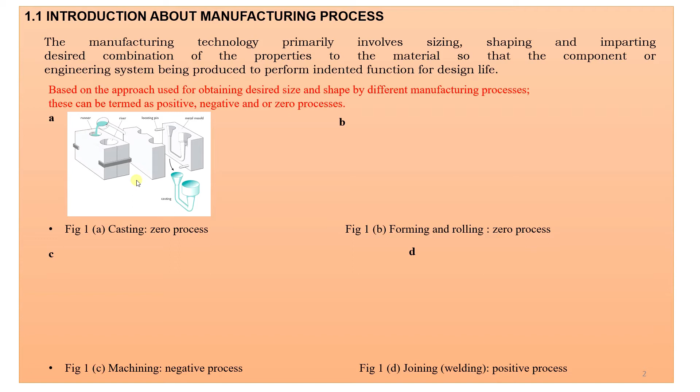Let us go to the second one, forming process. If you are taking X amount of material, you can use any forming tool. You can convert all the materials into useful work, and during the finishing operation you may remove some materials. If you're still confused with the first one, you can go with the second one. You take V1 as the initial condition, you are continuously putting it through the press, and as output you have a nice sheet. There is no material wastage, so we call this a zero process, and this one also a zero process.

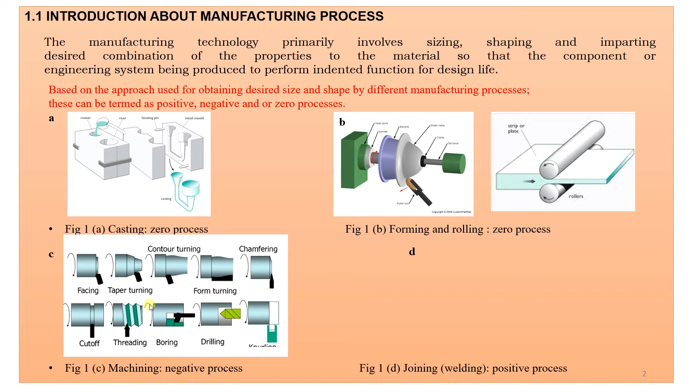Let us go for machining process. Initially you're taking one rod and you're going for facing, that means some amount of material is removed. If you see here the taper portion, some material is removed, and here also boring, drilling, etc. Let us compare the volume of the initial and the final. Initial volume V1, final volume V2, so the final volume will be very less as compared to the initial volume. So this is called a negative process.

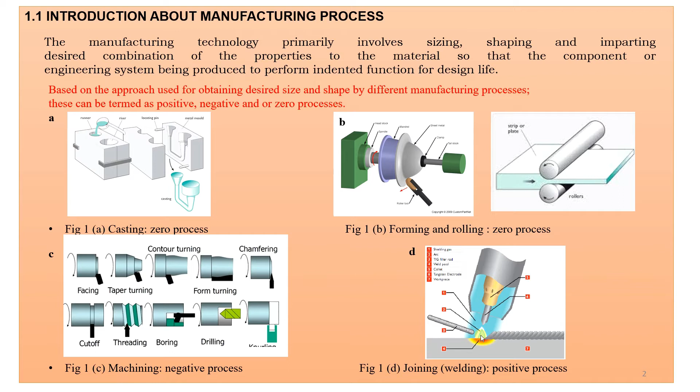Okay, then what about welding? In welding, if you are using filler material, we are going to add some third element over the welded joints, so material is added after the process. So if you are comparing the volume of initial and final, in most cases V2 will be higher, so that is a positive manufacturing process. You should know this simple phenomenon before you start the manufacturing process lesson.

Okay, now we are going to casting. Casting is nothing but you're going to melt the material and pour it into the required shape. Once it is cured, you're going to take the material out, clean it and use it. Okay, so what are the steps? Casting starts with pattern making. Yes, the shape which you want, you have to make as a pattern. Okay, a ditto of the shape. You can make it of any material. In the upcoming slide we will see what the pattern materials are.

Then obtaining the casting geometry. By using the pattern, you have to make the geometry or shape in the casting sand, or you can use any other casting process. Then if you want, you can go for core making or molding. Core making means if you want to make any hollow section, you need a core, otherwise you just go for molding, that's okay. If you have an alloy or any other material, just melt it, then pour it into the shape which you made in the sand.

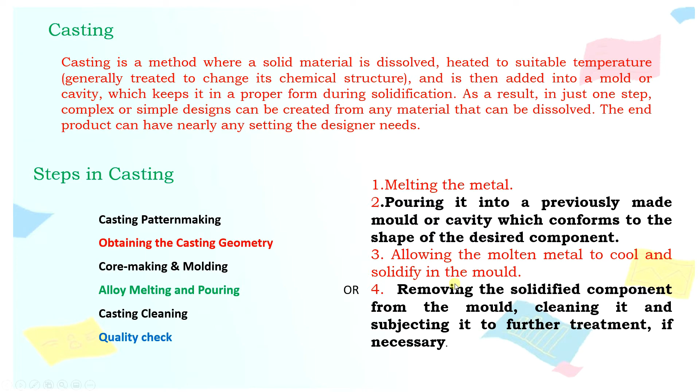So wait for some time. When solidification is over, when cooling down is over, then you can crack the mold and take the casting or the product which you want, and clean it. Finally you have to go for quality check. Right, so the same thing I have also given on the right hand side. If you want, you can study that one. It's a simple thing, right?

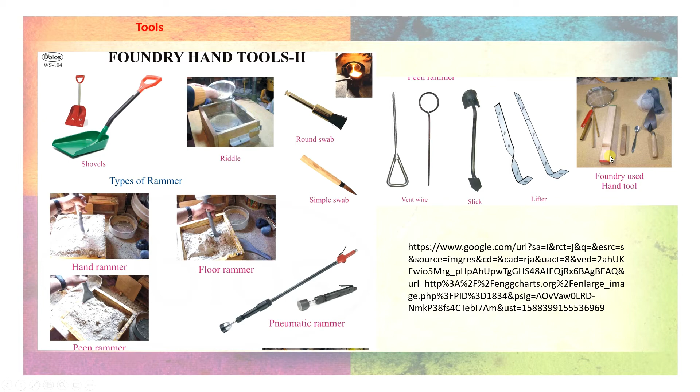Vent wires are available to make small vents, which are needed. These lifters are used to lift the mold from out. Foundry hand tools also include things like bars, strike-off bars, etc. If the mold is perfectly filled with the molding sand, you can use the strike-off bar to remove the excess material.

So each and everything is important, and some of the items I have shown here.

This is where we use shovels, and sieves or riddles are used so that you can take the fine sand. If you have any big particles, stones, or other things, you can easily screen them here. The hand rammer has different projections on both sides for use. Bellows are used to produce compressed air so that the particular area will be cleaned. Then slick tools and lifters are used.

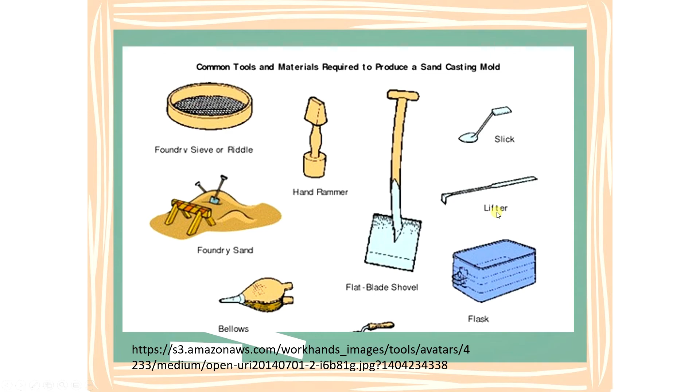There's a flask, and you can see real-time images I have taken from the website of foundry shop tools, showing all the items here - the molding box, vent wire items, rammers, etc.

Now, what is the process? First we have to put the piece or pattern - it's a two-piece pattern, which we can also call a split pattern. First we take the top. There are two types of boxes available: cope and drag, in the casting process box. The top side is cope, the bottom side is drag.

First you take the drag box, put the first half of the specimen, then fill it with sand. After that, using the strike-off bar, you strike off the excess material. Then you use your rammer to give some force from top to bottom so it gets compressed and sticks with every particle. Then you have to reverse this upside down.

After that, you put the cope box and put the alignment key in. Then you put the sprue pin, etc., and gating items, whatever is necessary. Then you put the same sand and do the same ramming process. After that, you slowly remove the boxes and the pattern, as well as the sprue pin, gates, riser, etc. Then again you align it properly.

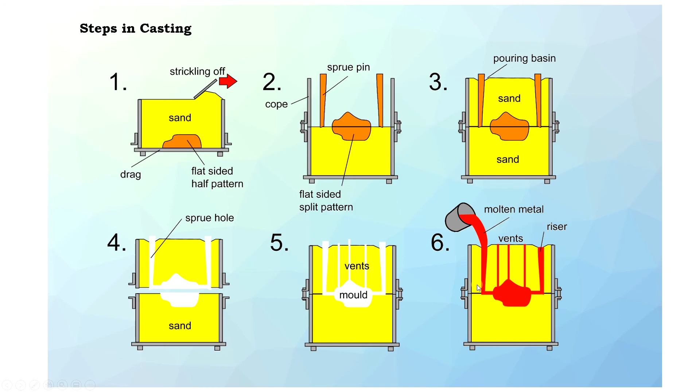So each and everything has its own function, which I will tell you. Now, some of the drawings.

If you are asked to make a drawing for casting, please make one like this, and you have to mark all the parts. Don't simply give one or two parts - all the parts are needed. Try to utilize this figure.

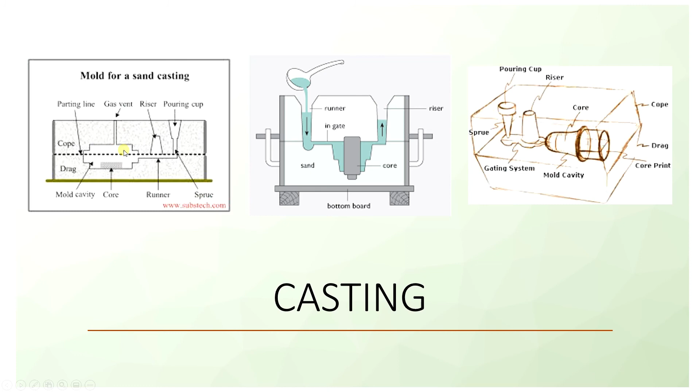As you can see, through the riser only we can see how much amount or how much length the molten metal was filled. If you have the vent, then any molten hot gas formed will escape from the gas vent. And now some clear-cut ideas.

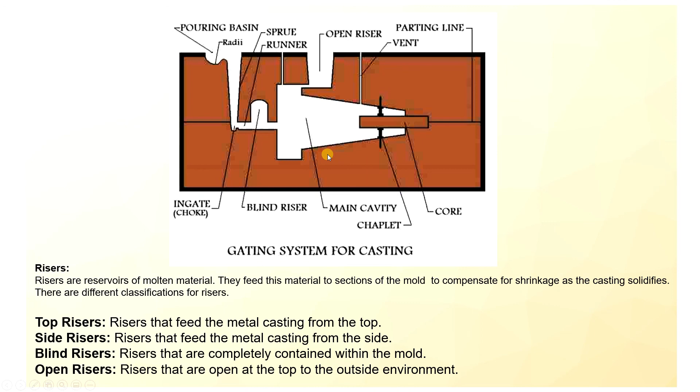And this is the main cavity. Chaplet is used to support the core, and sometimes chillers are used to cool down the mold casting product as fast as possible. I have already explained this in the figure itself, so no need to explain further.